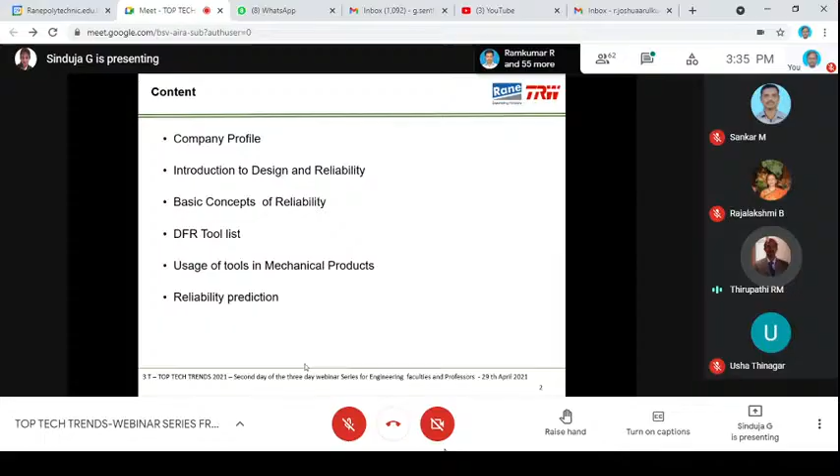So I thought this will be really a great opportunity to exchange my ideas, and then, as Madam was explaining earlier, if some of you can take 1 or 2 of these inputs and pursue them on your own in terms of your research, quoting, or examples for your real-time studies, I thought I would achieve my objective.

So this is the content of my presentation. I may not be completing almost 1.5 hours. I think I would finish it by 1 hour 15 minutes. Maybe another 5-10 minutes we'll have for some open question answers or some exchange of ideas. So I will start with the company profile to give an idea about my mental thought process on why I'm talking about such things.

The other contents of the presentation include the distinction between design and reliability. Okay, so what is the difference? I've included some mathematics for the entirety of the presentation. I do not intend to dwell fully on that, because once you start mathematics, people will start feeling it is too much, whether it's a student or any faculty.

So I would not go deeper into that, but some of my learnings from Dr. Washio and even my own classwork during my PhD, I have used some of them, so I really understand what is expected from the faculties and the researchers, so that it will be very useful when I talk about some of them. The other things to know are the handy tool list and application of such tools, especially in mechanical design and products.

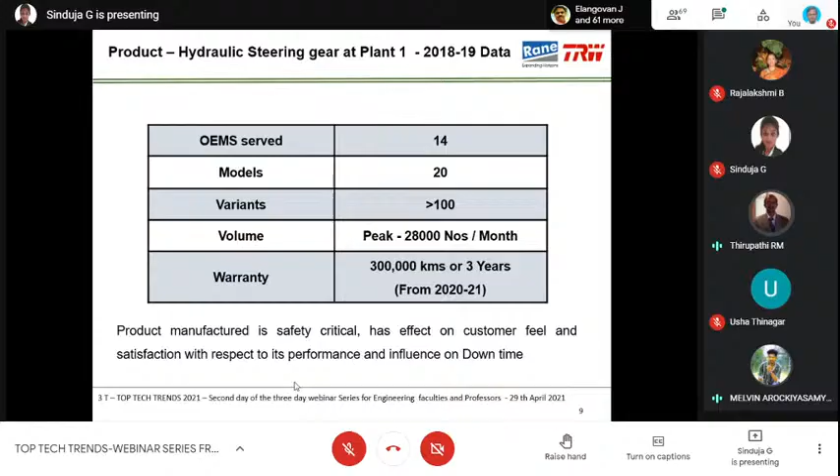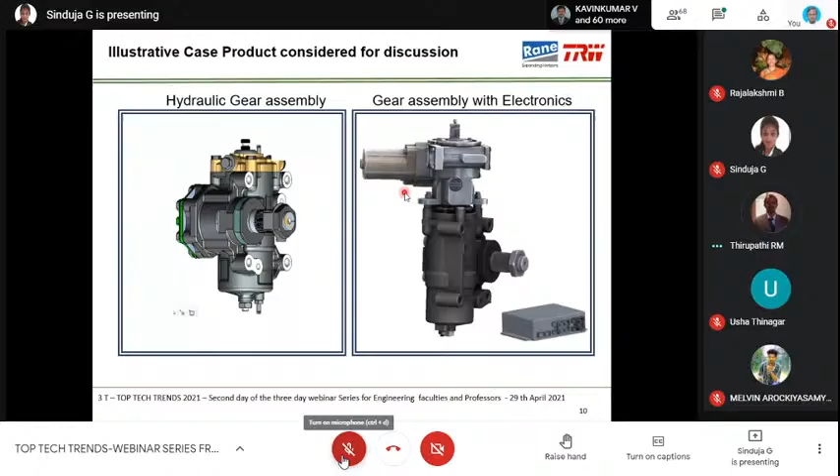I've highlighted some of the aspects in terms of my understanding, what we cannot afford to forget. So obviously, if you have a product, we need to have a user. So the user has a need, and that need has to be met by a stated objective during the entire product life cycle. So these are three important words: the user needs, in terms of the stated objective, has to be met through the entire product life cycle.

And obviously, as engineering people, we are using the help of mathematics and science to optimally convert the material to get the result out of the product. Now, reliability is the ability of the system to meet the stated objective in the stated condition for a specific period of time. Now there are two things getting added: the stated conditions and the time period. So if you're going to talk about reliability, I need to talk with respect to application, and I need to talk for a particular time.

This is very important because I was telling we are having a warranty of 300,000 kilometers, for a particular application. For example, the bus application is actually less severe compared to a truck application, so some customers are giving larger warranty terms - they give 5 lakh kilometers for bus applications, whereas for trucks they give 300,000 or 3 lakh kilometers.

So from that time onwards, Maruti has definitely defined a new standard for the Indian industry, in terms of reliability and product performance, and has been a benchmark for the commercial vehicle too. Next slide, please.

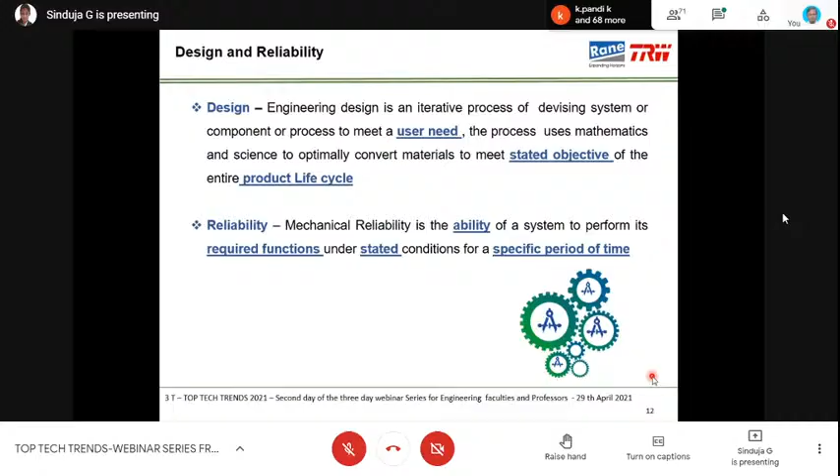So I was talking about the product life cycle. It's an important concept because about 85% of the cost is sunk into the design during its lifetime, during the design stage, like at the concept or system level, for example in a commercial vehicle.

When you talk about system design, like steering system design, 80% of the cost is fixed. If I want to go with a recirculating ball type gear design, it means my cost is fixed. I can't make it less. So this is an important concept.

The concept of design itself fixes 60% of the cost. For example, if I want to go with an electro-hydraulic gear or hydraulic gear, 60% of the total cost is determined here.

So what I'm trying to say is that only a very low amount of cost or influence can be changed at the later stages of the product life cycle. Manufacturing or operations can only improve product quality or reliability by 5 to 10%.

So it's very important that during design, development, and testing, these things are taken care of so that customers are happy and we really have a repetitive selling product. We call this a hit product, one that sells at high volume. Next slide, please.

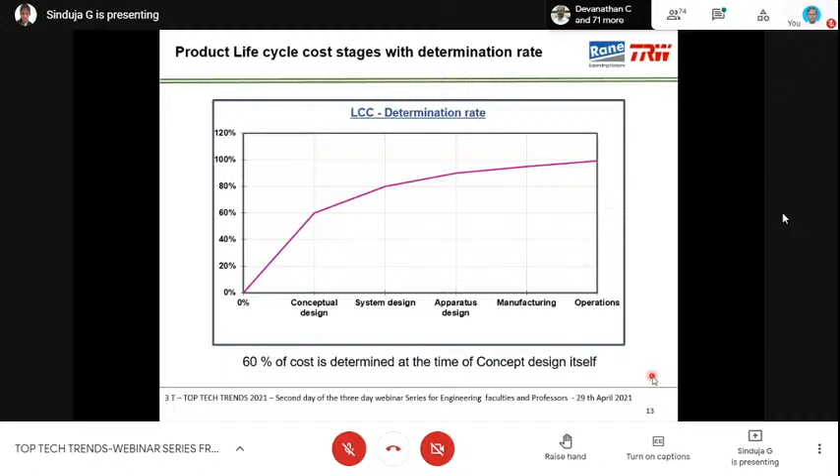Okay, so I'm trying to explain what areas need to be considered in design for reliability issues. These actually have a cause and effect relationship. We go through a reliability problem and then try to group them, to see what went wrong or what influence caused the problem.

If you look at that and try to group them, we find different areas to be considered, starting with CAD, FEA, or a database, then going to prototype evaluation and engineering model evaluation. I'm going to give 10 examples in the last few minutes of my presentation to clearly show how people have been able to improve the design from a reliability point of view.

So this might seem repetitive, but derating, safety factors, redundant systems, technical standards usage, engineering prototype evaluation, model evaluation—these have not been properly done in earlier work, causing real concerns and failures in reliability.

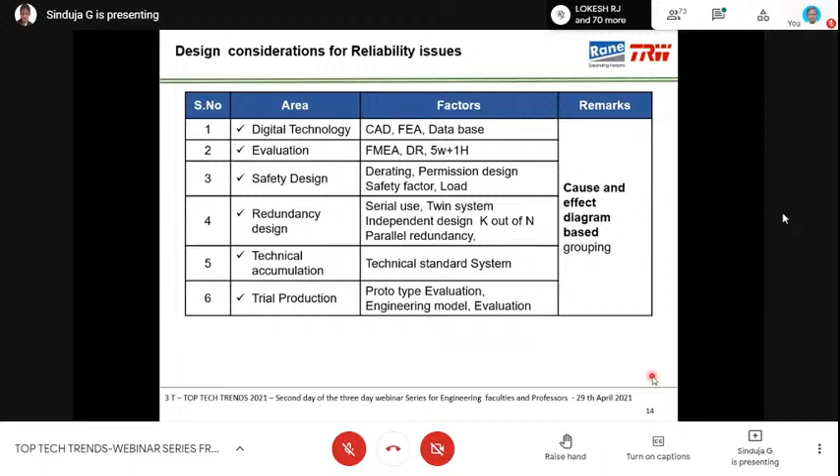You can go to the next slide, please. So when we talk about reliability, one important thing we have to remember is the bathtub curve.

This really looks like a bathtub. We talk about three areas of this bathtub curve: one is a decreasing failure rate, which comes down; then a flat one called the constant failure rate, or random failure; and the other is the increasing failure, or wear-out failure. I'm going to talk about this in more depth in coming slides.

So you can think of it like a bathtub. Many people think all products will work or fail in this way, but not necessarily. Some will have only the decreasing failure rate, some only the constant failure rate, some only the wear-out failure, or some a combination of all three.

This can be obtained by collecting data from the field or lab, like subjecting some 10 or 12 parts, or taking initial samples from the field, and then testing at least 20 to 30 numbers. But it's a very expensive process.

But overseas, when volumes are really in millions, for example in passenger cars, people used to test 200 vehicles. In fact, we also had experience when multiple products were launched simultaneously for various markets in the power rack and pinion division, across 4 countries or 4 continents. That meant they had to test in a lot of geographical conditions.

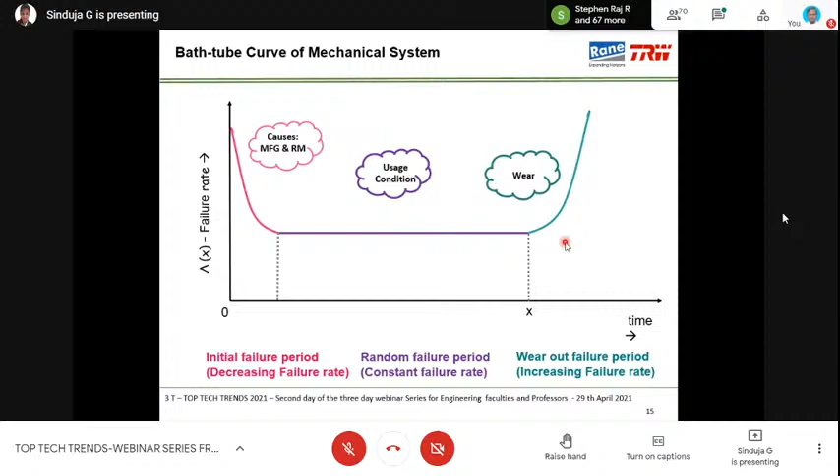They tested about 200 vehicles, so they really got good reliability data, with which they could give confidence to the customer in terms of the reliability they can deliver. Next slide, please.

So we are in slide number 16. This is a result of the solutions employed during real time problem solving.

So in my experience in Rane TRW, typically the premature failures are taken care of by consideration of the processing or manufacturing. If we are able to improve the process quality or the incoming material quality, we can really bring down the initial failure rates.

If you look at the failure rate graph, you can understand that, for example, within 10,000 kilometers, if the failure rate is very high, it means it's something to do with the raw material or process. If it's up to 40,000 kilometers, then it is something with random failure. It could also be due to severe usage conditions which were not tested during initial design.

For example, a better fillet could have been required. A simple example is a solution, but this could not have been brought out in the initial design testing, because you would have not tested a sufficient number in the field.

In the wear out failure, we need to consider a better material of the design, for example, if the material itself is getting worn out. We have nitrile rubber, which has a temperature limit of 120 degrees. If you want to use it at 135 degrees for a long time, like 8 to 10 hours, then we have to go for an even better material, from nitrile to hydrogenated nitrile, or even Viton type rubber instead of ordinary nitrile rubber. This clearly tells us that using highly reliable parts could also improve the wear out failure.

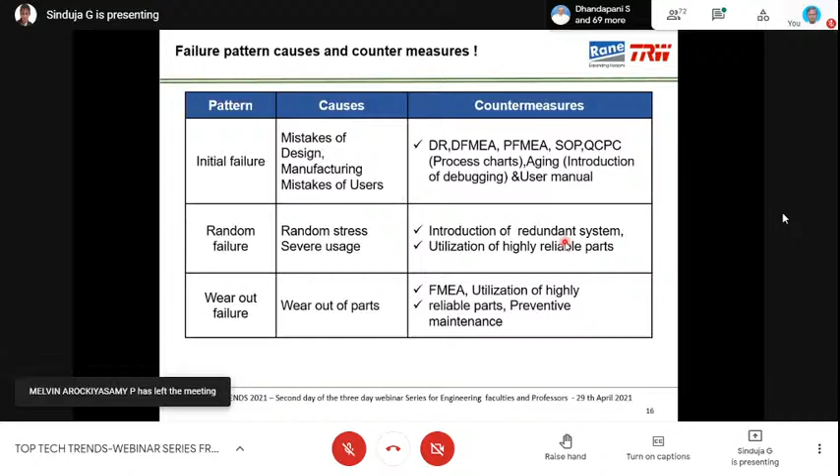Next slide, please. So design for reliability in random failure, I was telling, is slightly more difficult to handle. So simplification, standardization, and then design margins and redundantization are also important.

In terms of simplification, use of design standards for manufacturing - for example, there's always a difficulty whether to use a standard part or make it to the print. For example, I want to make a fastener, I want to make a bolt. Should I use a standard fastener, or should I make a special part to my own standards of material and thread fit, and also the heat treatment aspect?

This is slightly difficult, but in the past we always had special parts made to the drawing and print. But because the volumes are coming down, today we are trying to use standard parts, especially in commercial vehicles, and trying to accommodate it in the design itself with complementary parts. So reduction in number of parts is an example of simplification, and standardization - usage of standard parts like fasteners or bearings - is also simplification, which really helps prevent random failures.

In terms of electronics, combination of logic circuits, multiplexing of functions are also examples. It's quite difficult for us to understand here in terms of the automotive industry for design for random failure prevention, but I'm going to give some examples so we clearly understand the reasoning, and then try to provide redundant seals, redundant bearings, things like that.

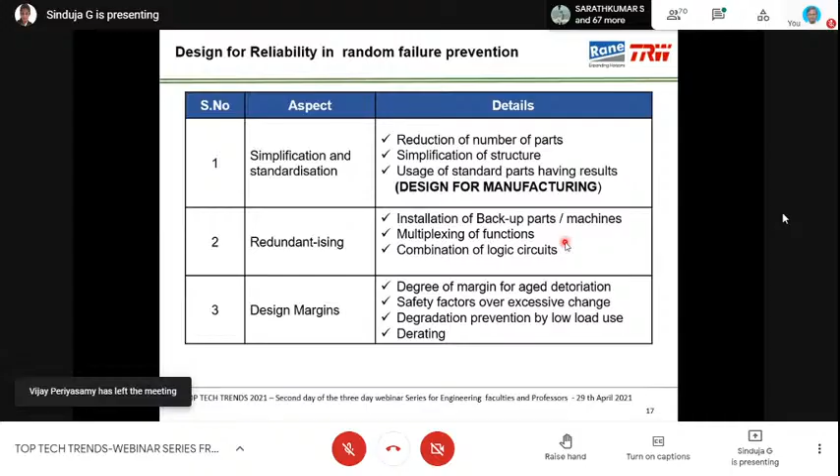And slide 18 indicates some more details of the design aspects that can be considered for random failure prevention, such as a fault-tolerant system, using fail-safe, fail-soft, or foolproof concepts. Some of you may be aware of all these things, but I thought it is important to understand the conditions of fail-safe and fail-soft.

Fail-soft is like a tubeless tire: the tire is going to leak, but it's not going to stop the vehicle movement. You can drive for, say, 100 kilometers, so the failure is soft in nature, allowing us to run it for some more time. This is fail-soft. Fail-safe, again, a very classical example is our own steering gear design.

I will again talk about this. Please bear with me, I may repeat it, because by repetition I think you will understand what my mind is thinking.

In the hydraulic gear, we have the mechanical gear, the hydraulic valve, and the hydraulic piston. All three parts are combined. So even in the hydraulic failure, the mechanical portion is going to be available. The hydraulics fail, but the mechanical gear will still be working. So it's a fail-safe design: you can still operate, but with a reduced performance level. This is a fault-tolerant system with fail-safe or fail-soft.

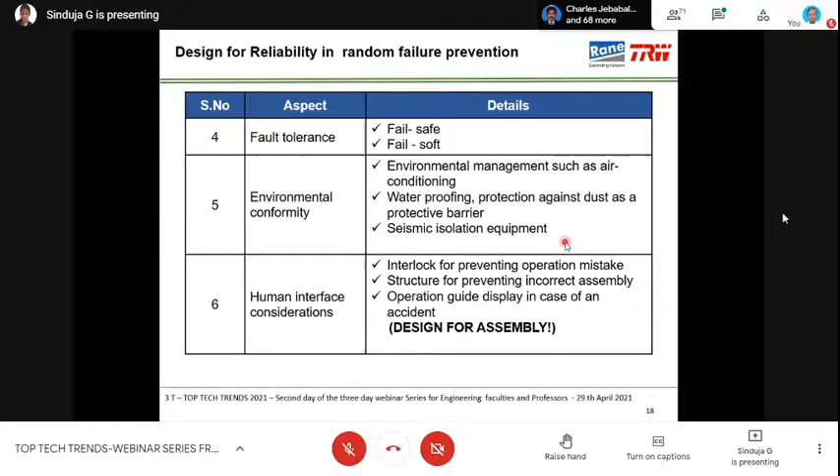Some of the examples we have in our own product, I will try to explain. The structure for preventing incorrect assembly: we have a proper poka-yoke so that there is a direction available. We have a taper so that we are not able to assemble it in an inverted way. Or we can also use an operation guide display, but that is the last one, because nobody is going to keep looking at the guideline for assembly purposes.

Next slide, please. Yeah.

There are various types of distributions available, but to make life simple, I have taken only the Weibull distribution and exponential distribution in the coming slides, so that we can understand what's happening in usage, whether it's a process-related or material-related issue. In the Weibull distribution, we have all three failures: increasing, decreasing, and constant. The magenta color is where m is greater than 1, the shape parameter.

For the Weibull distribution, we classically have two-parameter or three-parameter forms. Here I am talking about the two-parameter Weibull distribution to make life simpler. We also have the three-parameter Weibull distribution, which also has an offset parameter, but I am not going to talk about that. When m equals 1, it becomes the exponential distribution. That is a very useful way of looking at the Weibull distribution.

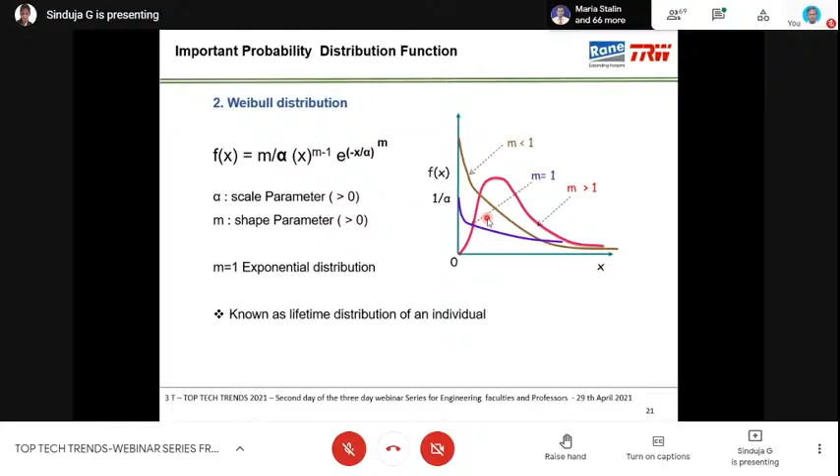Mechanical engineers as well as reliability engineers are very fond of using the Weibull distribution because it makes life easier to predict all three failure rates with a single mathematics, and then you can look at the various time factors and decide which part of the lifetime we are in, whether decreasing, increasing, or constant failure rates.

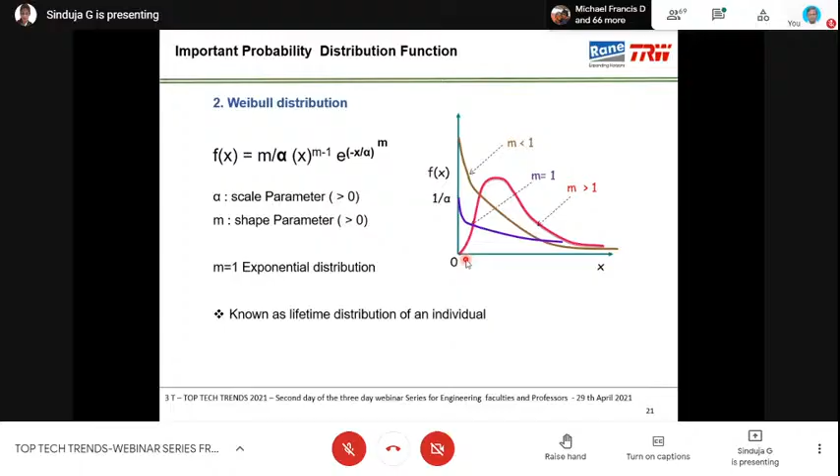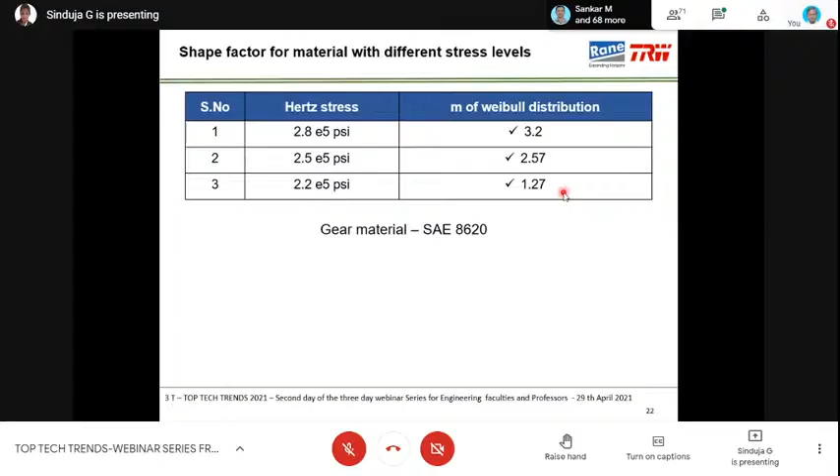Okay. Now we are in slide number 23. So classical examples of an exponential distribution are the electronic devices like transistors, diodes, resistors, and condensers, which don't have an increasing failure rate. So either they have premature failure, like I was explaining.

Electronics always have a problem of either the raw material or a processing issue. Only those failures are there. There's nothing like wear and tear happening, like a mechanical part where you have an increasing rate.

I see that Mr. Tirupati has lost the connection. So, Ms. Sindhu. Yes, ma'am. Can you continue from where he left? I think he has just left by mistake. Yeah, I think his connection is lost. Ma'am, can I take the electronics reliability? Because I'm not a mechanical person. No, I can continue. Oh, he's come back. Okay, he's back.

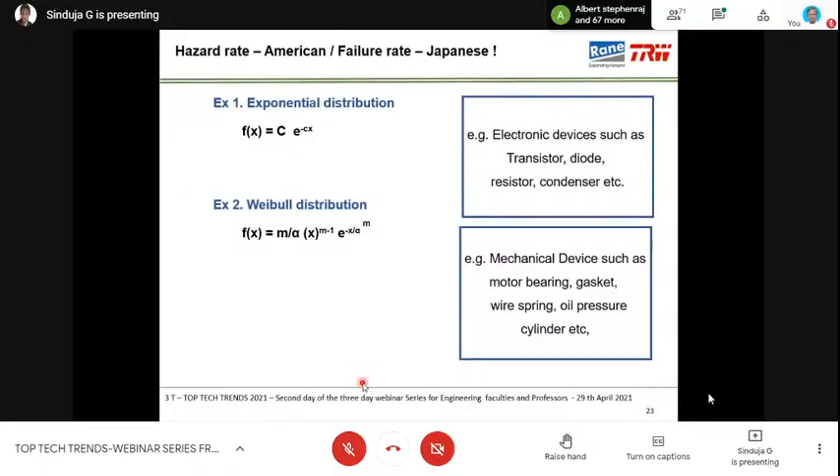So in terms of slide number 23, for the Weibull distribution, the classical examples are the motor, bearings, gaskets, cylinders, etc. So mechanical devices, as I was explaining, always follow the Weibull distribution. Next one, please. So as I was explaining earlier, the bathtub curve itself is not a single failure rate, but a combination of 3 failure rates happening for different products, or could be one product. So a less than 1 initial failure rate.

If you look at the green curve, it's a decreasing failure rate. If you can recall, it's an exponential distribution. The blue one is a flat curve, the random failure. It's very difficult to analyze random failure. Typically, it happens due to usage conditions. For example, a tire going over a pothole, which is very difficult to predict. And randomly, it can happen.

Of course, in India, on the classical village roads, you can always expect more of such failures because the roads are not good, causing wear out of the tire, tire bursts and things like that. The other one is wear out failure. Typically, it happens when the parts get aged.

For example, when you talk about 10 or 15 years of a product being used in the commercial vehicle industry, definitely beyond 5 years, you will start seeing products getting deteriorated and worn out. Like a human being, the bones get worn out, the skin gets worn out. Mechanical gears always get worn out because of the usage conditions. So the magenta line is showing increasing failure.

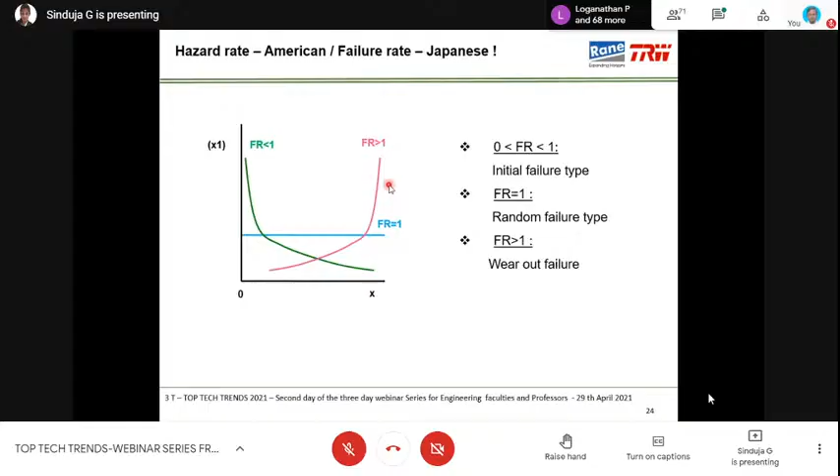And some of the journals, when you look at the overseas journals, like American journals, they talk about hazard rate. So don't get mixed up on that. So they talk about the failure rate. Okay, next slide, please.

So this is the same curve as earlier. So the first one is called infant mortality, or the decreasing failure rate, decreasing hazard rate. Second one is a failure not depending on the age, like puncture of a tire or something happening within 40,000 kilometers, or something like that.

But if you have a warranty policy of 300,000 kilometers, I would expect that the constant failure rate would happen from 40,000 kilometers up to maybe 250,000 kilometers. So this is my guess. So it could happen anywhere in between. But if you look at the tire itself, people don't give warranty beyond 50,000 kilometers. People think the tire has to be changed.

So each of the products in a commercial vehicle have their own failure rates, and each of the manufacturers or suppliers have their own failure rates because there's a limitation of the product itself. So people are coming with new innovative designs, like the tubeless tire is definitely one of them. So instead of allowing them to run for 100,000, 200,000 kilometers, we are having redundant tires in a commercial vehicle so that even if one goes off, we can run it for some more time.

Of course, tubeless tires are not coming to the commercial vehicle, but I think it's a matter of time. The tubeless tires also will come in, because there is some difficulty in the rim sizes and also the maintenance of the rims, because it cannot take a deformation of the rim. Now the last, but not the least, is the increasing failure rate. Definitely, this is wear. Can you go to the next slide, please?

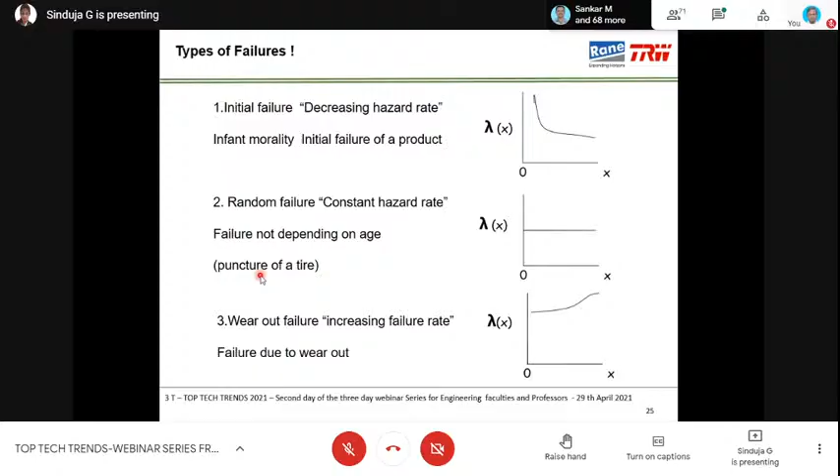So I will explain some of the concepts, how in the product life cycle we can take cognizance for improving the product design, cost, product quality. I was telling about QFD, not explaining. QFD is nothing but a quality function deployment tool. It's actually a very powerful tool used by the Japanese to convert the engineering requirement or a customer requirement into product specifications.

For example, I want to use it for 2 times the rated load. I want a factor of safety of 3 times the rated load. For example, burst test, I want 3 times. What is the minimum voltage I have to maintain? So some benchmarking can be done. So we don't have enough data, but sufficient information is available.

So don't get me wrong that data is not required. Data, I mean extensive data in terms of number crunching. I'm talking about running some 200 odd information and then generating the classical curves, getting the Weibull plot, and then getting some B10 life and all that. So those types of things are not required. The other one is redundant design. Again here we don't require data. We have some information in terms of benchmarking.

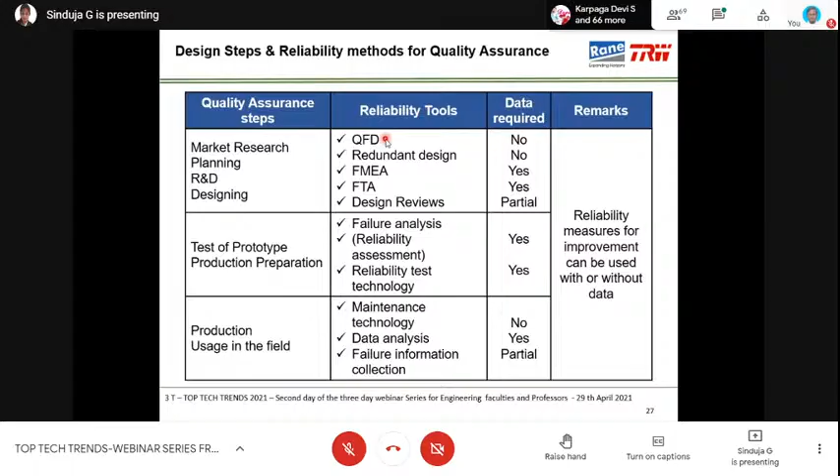For example, Toyota gives a B5 life of 500,000 kilometers on their own product lines, whereas for Indian customers, we talk about B10 of 300,000 kilometers. So you can understand the difference in the technology of the products in terms of how they are able to provide a higher confidence base. Basically, they are able to do a lot of work on employing the design concepts ahead of the competition. Next one.

So I come to slide number 28. So this is how you go about improving the product reliability. Very simple, like a PDCA concept: plan, do, check, act. We have to first plan what should be our reliability, that is, we have to specify the reliability. What is the reliability we want? Then we have to design for it, then test for it. This is the do part of it. Then check for it in the manufacturing. And if there's a problem in the field, we have to work on improving it.

So this PDCA cycle is being used across any product improvement whenever you have a difficulty in doing something. Sorry, the plan part comes with specification, the do part comes from the design and testing, the check part comes from manufacturing, and the act part comes from the field usage and the continuous field quality improvement. Next one, please.

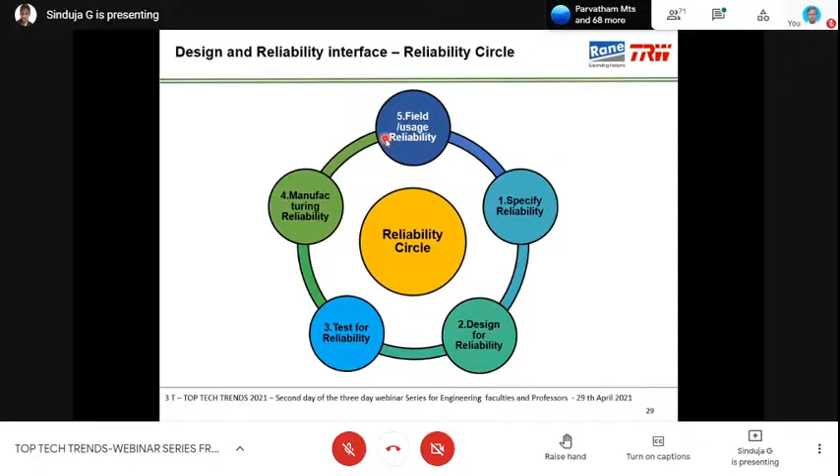So now, how to set this specification, reliability targets? Various inputs are available from the customer, OEM, or a program, from the past experience, or the top management. And we require sufficient information like warranty data, customer survey data, benchmarking, end user duty cycle, manufacturing data, operating environment, and the policy of the percentage, like how many percentage of defects I will allow.

For example, I'm going to talk about the output here: failure free period, incidents per 1,000 vehicles, mean time to failure, or MTTF, mean time between failure for the parts which are going to be repaired. And like B10, that is 10% failure of the life. For example, if I launch 100,000 numbers in a year, I will allow 10% of them to fail within this. So beyond that, they have the design life. I'll explain again with some more clarity later.

Now, processes in terms of apportioning, considering the criticality and the product life cycle costing. This is actually given to the product and process design teams. So the reliability is set based on the past experience. Typically, the customer or the top management, when launching a completely new program, says, okay, I want to have a higher warranty policy. Then probably I will use a higher design specification. Then over a period of time, I will be able to improve the product specification to the customer. That's how the top management can give a direction at the start of the design. Next one.

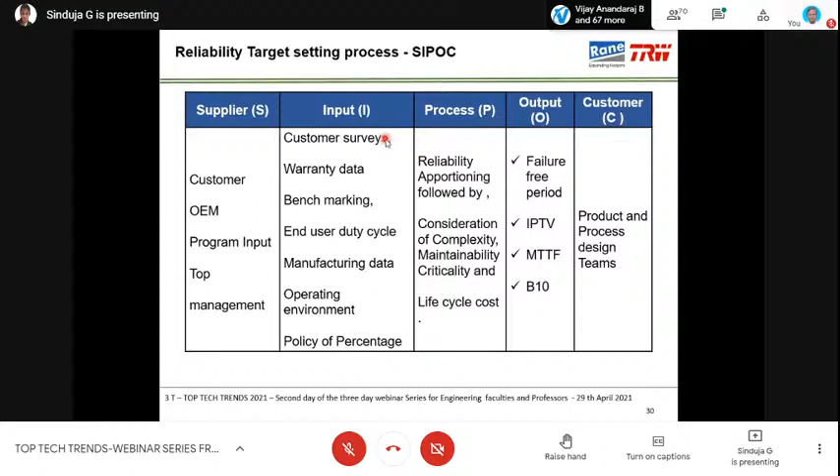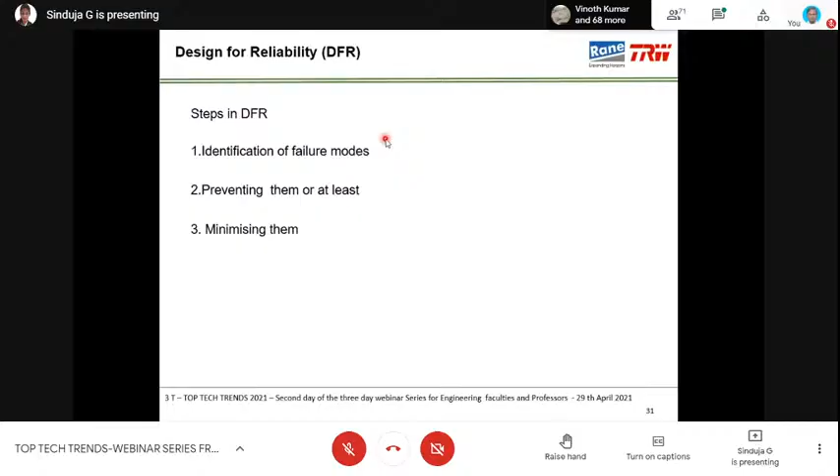So, what are the steps of doing the DFR? Identification of failure modes, preventing them or minimizing them. So, how do you identify the failure modes? I've taken only very simple examples here of a DFMEA. FMEA I was telling earlier, now I'm talking about DFMEA, the design failure mode effect analysis. The other one is the process failure mode. I'm not talking process failure mode, even though that also has to do with the process design. As a product designer, I'm talking DFMEA. And then the fault tree.

Fault tree is actually trying to get the actual failed part, looking at it part by part, trying to understand what is the failure, where is the failure, which component has failed, taking a closer look from the Gemba, looking at the product and the physics of the problem. Then really I can understand what has gone wrong. The fault tree analysis is a very useful tool to identify the failure modes.

Now, some of the other prevention modes are to have a stress analysis and parameter design by design of experiment. And then minimizing failure modes is the tolerance design, design for manufacturing. I was explaining earlier about the classical problem of using standard parts or made-to-print parts. Okay, so still a lot of debates go on, but the latest thinking, obviously, is to make the cost less.

People are talking design for manufacturing using standard parts from the big suppliers, using the tolerance design so that we can overcome the failure of the parts by means of taking care of the design itself, so that the tolerance can be accepted as it is from the large volume manufacturer of a fastener or a bearing. Now the other one is implementing redundancy.

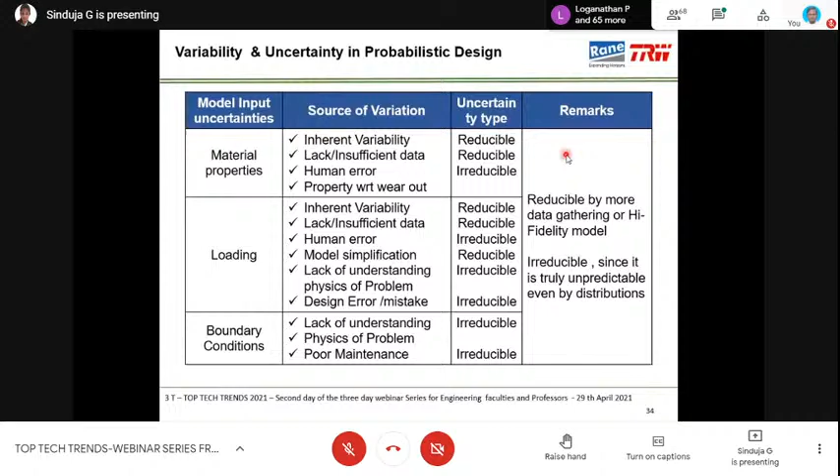So this was really one of the problems we had in the last 2 years, which we could actually resolve with a lot of time and money spent. But it's very tricky - there's a learning curve for us in terms of trying to understand what can be done for the boundary conditions to be understood. So we really have to run in real life conditions and then probably have sufficient representation of what's happening in the field.

Next one - so when we come to reliability predictions, please. So I'm giving a classical example of a spring here. Just give me a minute where I wanted to understand what are the different causes for the failure.

Okay, the different failure modes are like fracture or loss of spring rate. Looks very simple, isn't it? The failure mode is what we can actually see - as an end user, it's fractured, broken, worn out, spring is lost, spring tension is lost. Now, what are the causes for them?

If the fracture itself could be because of a material defect, so now you can recall this material defect could cause a reducing failure rate, or it could be a starting problem like decreasing failure rate. You can recall that raw material problems will typically result in a decreasing failure rate in that part of the bathtub curve. Now hydrogen embrittlement is again a process.

So we had a classical example of this hydrogen embrittlement in some of our fasteners, because when the part is getting heat treated, we have to follow the hydrogen de-embrittlement process so that cracking doesn't happen on the part.

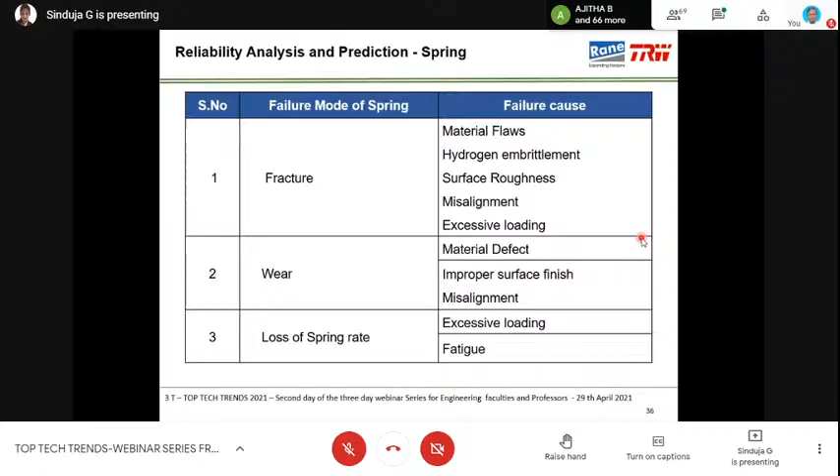As you look at a design standard for a steering gear, I think we have evolved over a period of time in terms of what needs to be done, what are typical failure parts, and how to take care of them.

So I was trying to explain factor of safety earlier. For example, factor of safety means we have to design the material to withstand a stress. Normally, a safety factor considers a deterministic value of stress in the part against the material strength. In reality, they are random variables. So as I explained earlier, the stress and the strength are not a single point, not single deterministic values. They have their own curves.

Imagine here there's an overlap, so the intersection is actually a zone of failure. That can be calculated using a simple mathematics formula for safety margin, by means of the difference between the stress and the strength. Strength is the material aspect, stress is what actually happens in the application. So with respect to the variability, we can get the safety margin.

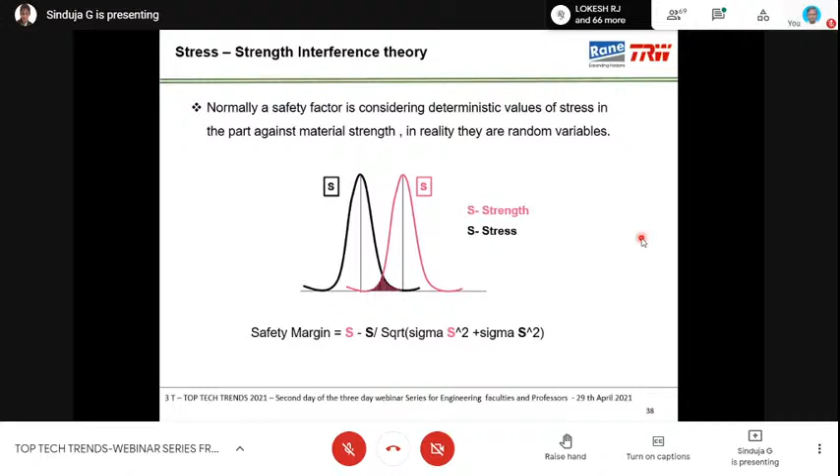So this is some examples of stress and strength data. The stress we talk about is mechanical stress, tensile or compressive in nature. Strength refers to ultimate tensile or yield strength, the different types of strength. These are design factors that affect stress, for example due to cyclic load, duty cycle, speed of operation.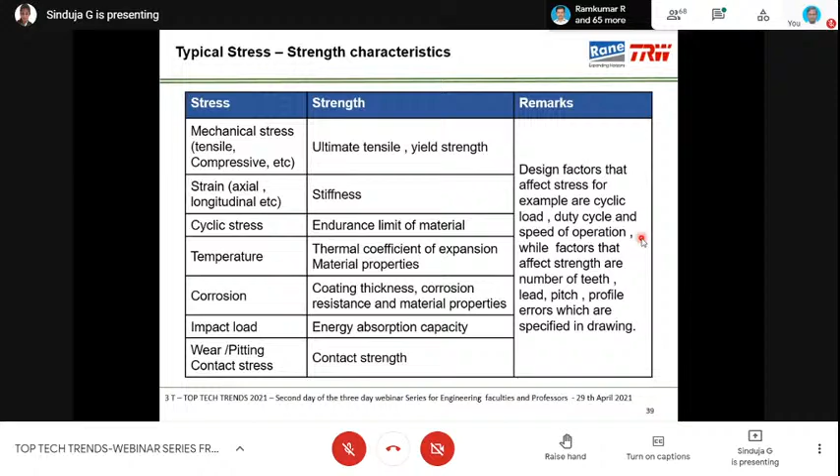Factors that affect strength include geometry, number of teeth, lead, pitch, profile error specified in the drawing. So definitely we have to take care of both aspects - how it's going to be used and how it can be determined in the application. If you look at stress, for example corrosion stress, the strength could be the coating thickness, corrosion resistance, or material property. This has to be taken care of. Wear or pitting contact stress has to be taken care of by the contact strength.

In terms of the duty cycle, cyclic load, speed of operations, aging - that's some of the stress-related aspects. Strength could be heat treatment, dimensional assembly process, variations, bending strength, etc. So strength is specified and built into the design, and the stress is developed during usage.

Strength is obtained during the lab test. Stress is obtained in usage condition and usage profile that should typically represent 95%. But with my recent experience, I think 95% of users is not enough. We should look at 99% of users so that we reduce the warranty cost.

Last but not least, the simulation, like Monte Carlo simulation, can be used to evaluate the stress and strength distribution for obtaining the life distribution. I can specify the curve itself - okay, this is a normal curve or a normal distribution with what is the variability of that.

So if you recall the stress and strength curve, factor of safety or the design margin I was explaining earlier, we can actually do a Monte Carlo simulation so that we can estimate the amount of overlap. By means of the latest tools, we can predict reliability. It's very funny that we can do prediction of reliability without actual high volume testing. I think our computer engineering comes in to help by use of tools like Monte Carlo simulation.

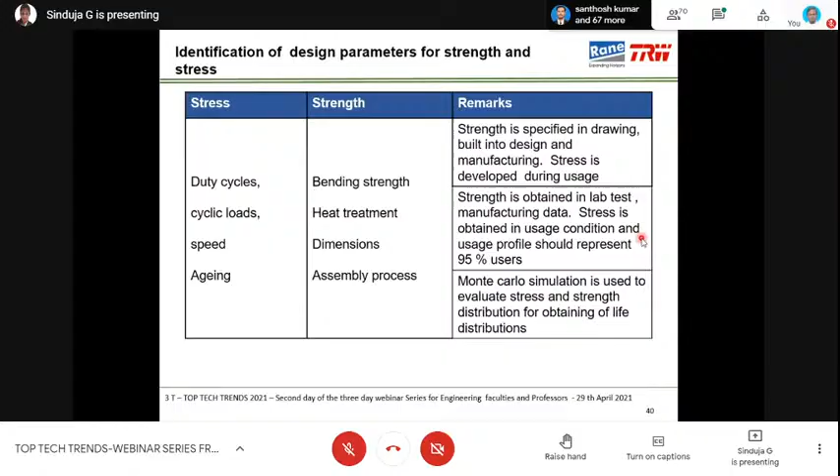With that curve, I can actually get the real-time factor of safety, which can really help me tell whether that's good enough or I need to improve something else in terms of the safety standards or strength itself.

Human interface reliability, I was talking earlier again - foolproof, fail-safe, fail-soft. Foolproof is the process designed in such a way that the activity of negligent performance, which becomes the cause of failure, is not allowed to happen. Classical example: camera, shutter, and a flashing device. That's foolproof, I already told this example.

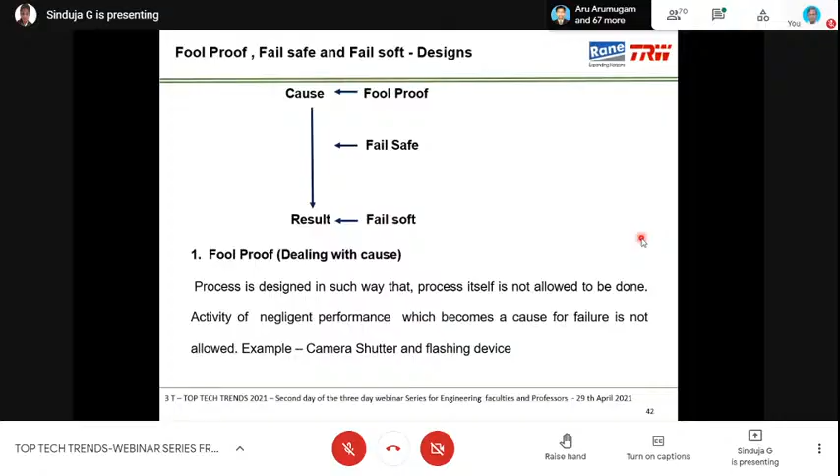Fail-safe: even if it fails, it will work safely, allowing the system or component to work with limited trouble or limited performance even after the failure happens. Like hydraulic steering gear with a pump failure - the gear can work in a mechanical mode. I explained earlier, the hydraulic gear is a combination of mechanical gear with a hydraulic valve and a hydraulic piston.

Fail-soft is like a battery in an automobile - it doesn't go off suddenly, it wears out, it starts discharging slowly. It's strange that during my experience in a car, the battery suddenly went off. I think I was quite unaware because the maintenance was so good that it suddenly failed one day after crossing 4 years of life, and suddenly I could not start the car.

And found that the battery was completely drained. But normally what happens is you get some starting trouble, then the starts, the light gets dim. With improvement in battery technology, I guess fail-soft design in batteries is getting highly reliable in nature. But tubeless tires is another classical example - I already told that it occurs very slowly, you can actually use the vehicle for some more time.

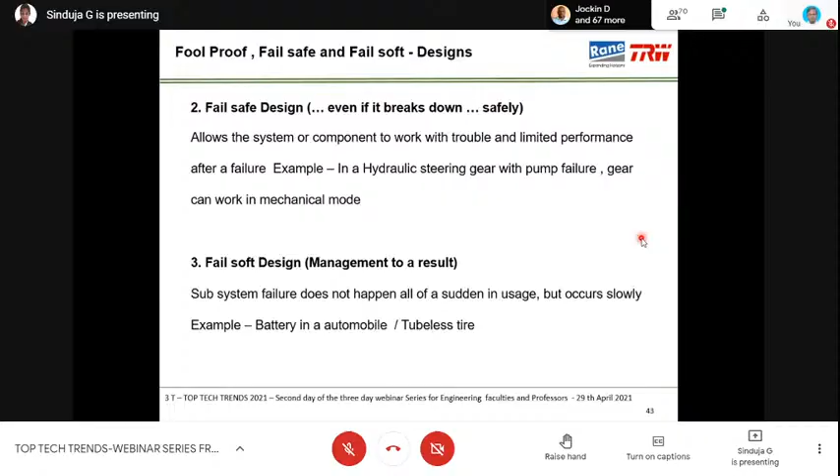Now, test for reliability - how do you estimate reliability? Without testing, you cannot really get the reliability curves or reliability value.

So you have to use practical usage tests or accelerated durability tests or special environmental tests, like to simulate the field or drive condition. In the lab, we have to use a bench simulation, like an engine bench simulation test, or a lab bench - for example, steering gear using a bench simulation test. It's a system - like steering gear and hydraulic pump - put together and tested as a system.

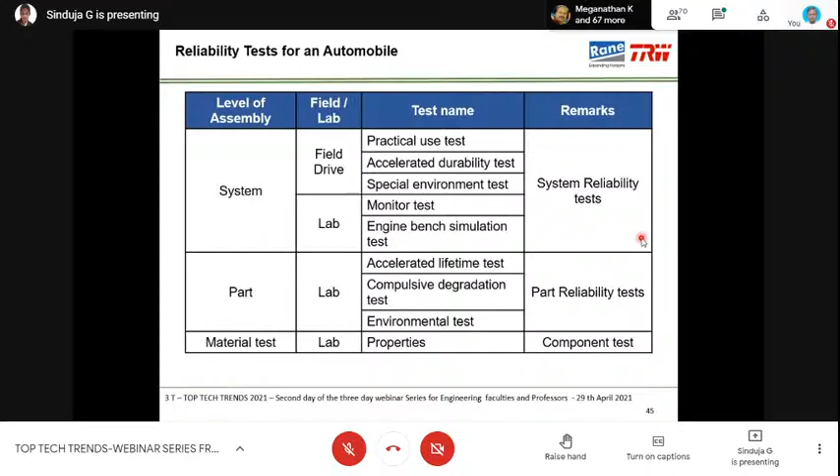We also do rubber parts accelerated lifetime tests and compulsive degradation tests, like high temperature part reliability tests, or low temperature with contamination. So it's a degradation test, typically to take care of the environmental aspects. The material test is another important area. For example, lab tests on the metal property itself can be verified.

Next. I was telling about the B10 life. So if you're able to plot the life of the gear parts as they get worn out, the numbers keep increasing with respect to time. This is not the failure rate. This is the failure. Okay, so this is not a bathtub curve, so don't get confused by that. The area under the curve, B10, is where 10% of the population has actually failed.

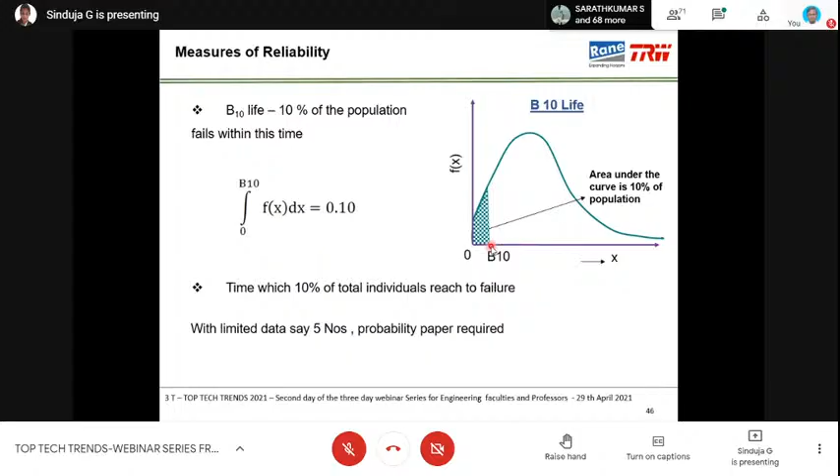So we might use special probability papers to estimate the B10 life when you have got limited information. At least we have to have 5 numbers. Our guru, Dr. Washi, used to tell that at least 6 to 10 numbers is good to test at a component level to get the B10 life. The OEMs try to do 20, 30 numbers, but some of the fast car customers, as explained, do up to 200 numbers to try to get the B10 life. Next one, please.

So reliability estimation is done on a new product in order to predict the field quality, to judge whether the field quality achieves the target. For example, no failure up to 3,000 hours of operation in the lab or in the field. So laboratory tests should be conducted. If it does not achieve the target, some design changes must be done. So this is a classical example. If the product is not achieving that reliability target, what to do?

Typically, as a designer, I would tell, okay, we have to improve the process. But Dr. Washi used to tell that if something is wrong with the testing, and you are doing it as a designer, what is under your control is the design. So you should do some changes in the design. Let us not forget the product life cycle itself, where we already told that 80% of the cost is taken care of by the product design. Obviously, the place to improve is also the product design rather than the process design.

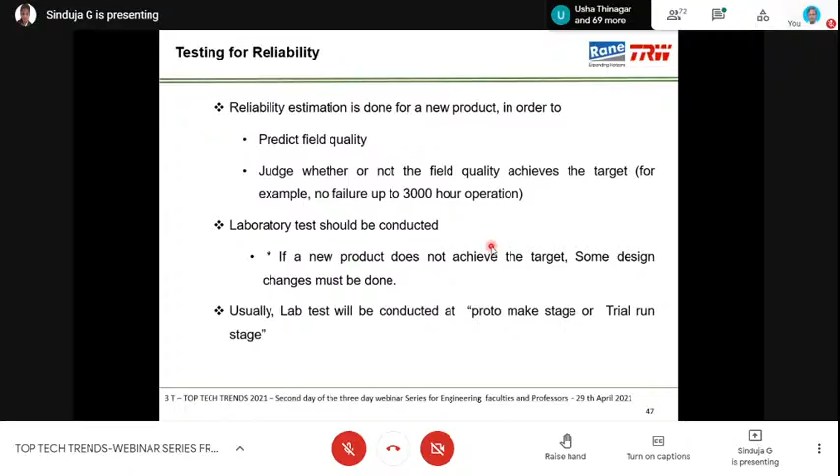Usually, lab tests will be conducted at the proto stage or in the trial run, so that we get a good correlation of the actual field data and the proto data, which can be extensively used for future products. Next one. Step one, find out the proper lab condition so that we have the same failure mode. This is very important. For example, I have a seal failure, so my test lab should also have the same failure. I should not get another failure mode, otherwise it is not of any relevance to me. Failure mode should be the same.

There must be a correlation between the field tested data and the lab data in terms of the slopes. The product must fail or suffer the critical failure mode in a specified period of time. For example, in the lab, it should fail within a week, 2 weeks, or within a month. The proper lab test condition is actually found through trial and error. Very difficult sometimes. But with the experience accumulated by the industries, classical test conditions have evolved, so we are able to get the proper lab test condition. We have standard lab tests used to predict the lab failure modes, then try to see how we can correlate to the field test.

Field failures, typically in hydraulics, are seal leaks, sometimes noise issues, and very rarely a classical breakage problem, because the design has matured over the last 40 to 50 years. But this is tricky in terms of the noise and the leakage, where we are currently trying to improve the reliability. Next one.

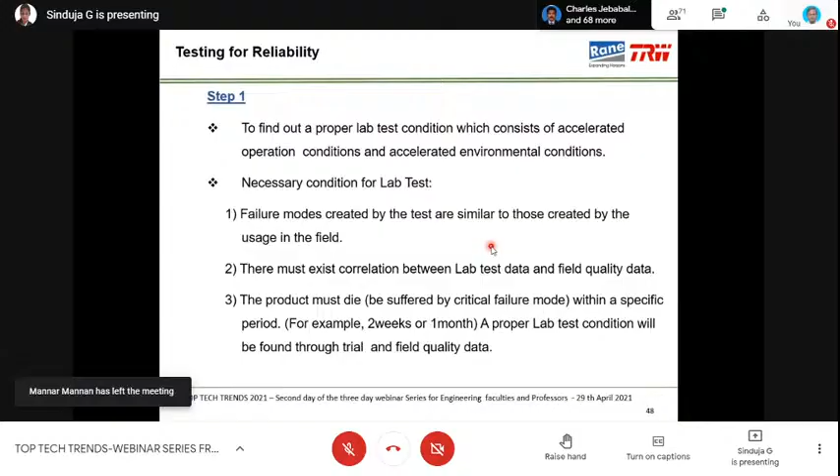So this is a classical example. Product one, the B10 life is 50 hours, and the field data, for example, is 15,000 kilometers. Okay. So second one is product two. The B10 life is 100. The B10 life is 35,000. So if you look at it, there seems to be some correlation. Like there's a factor of 300 in the first one. There's a factor of 350.

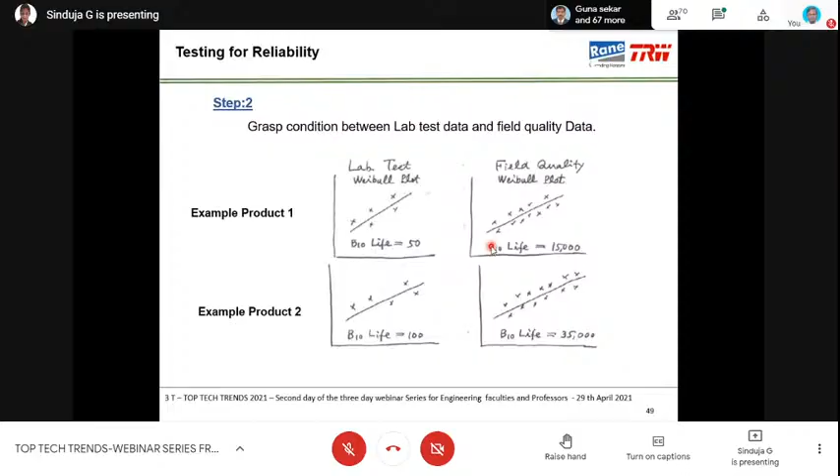Now when you do a product three, you go to the next slide. Okay, B10 life is 200. So typically based on the previous experience, I can give a B10 life of 60,000 to 70,000. Okay. So this is how the field quality is predicted with the lab test data. So that's my thinking of how to go about improving the product reliability. Definitely, we have to specify the B10 life. You have to do both the lab test and the field test of the past information, and then try to predict the future. Next one.

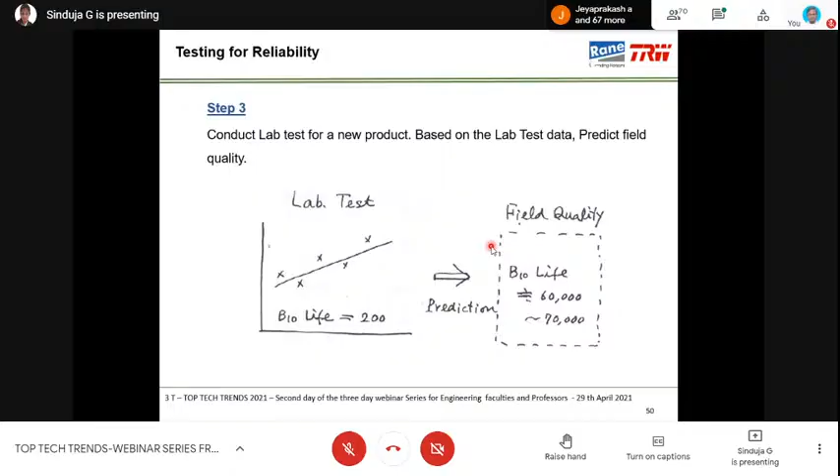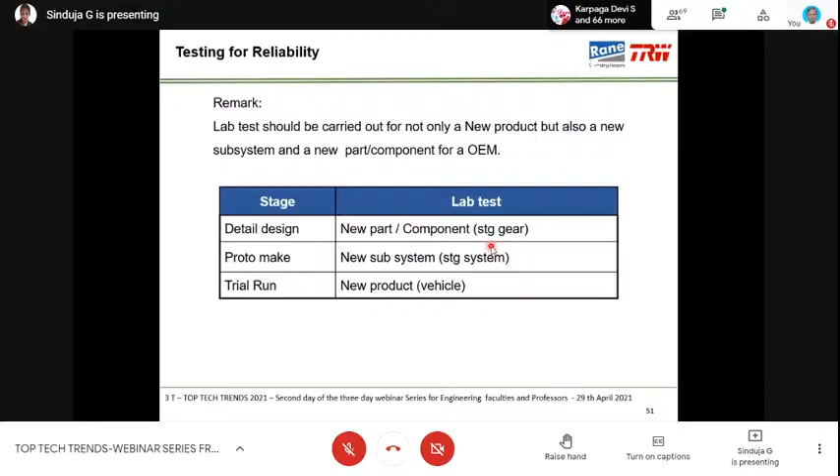Yeah. So lab test should be carried out for a new product, but also on a new subsystem or on a new vehicle, OEM level. Okay. So only then we get complete information of what the typical failure modes are. Next one.

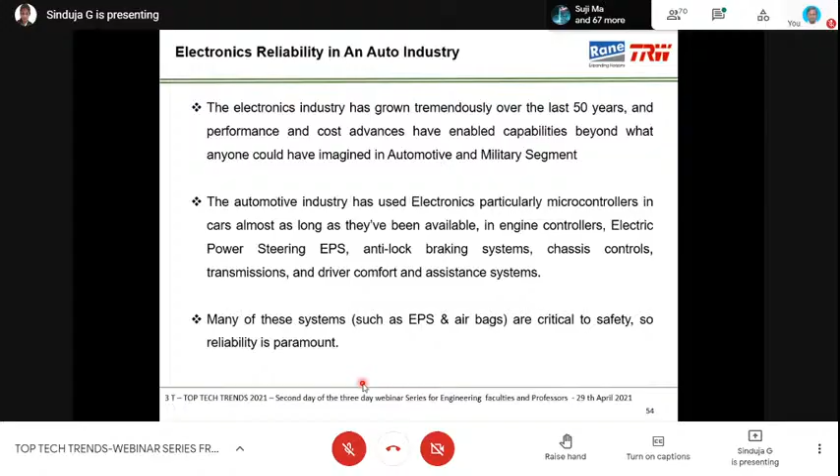Even a simple low-cost hatchback car contains at least 5 to 10 ECUs, basically for engine, steering, braking, window, and infotainment, in which many of the systems are safety critical. Example, steering and braking systems. In these systems, safety is critical, so obviously reliability is paramount. So I'm moving to slide number 55.

So back in 1990, General Motors, Ford, and the semiconductor council created the Automotive Electronics Council to set a standard for temperature and pressure resistance for electronic components to ensure the consistency of the safety specifications. So as per the standard, AEC Q100 is for integrated circuits, for example, microcontrollers, gates, EPROMs, drivers, and other power controller ICs. AEC Q101 is for discrete semiconductors, for example, MOSFETs, transistors, FETs, etc.

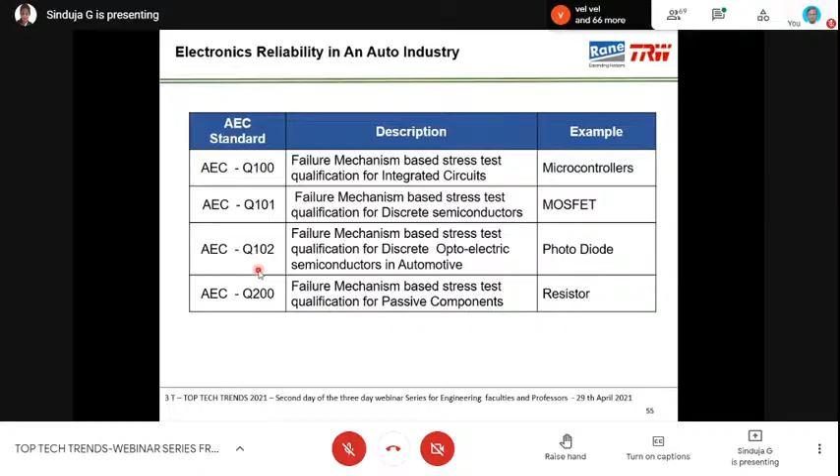Q102 is for discrete optoelectronic semiconductors, for example, the photodiode and phototransistor. Q200 is for passive components like resistors, capacitors, and inductors. To summarize this slide, the automotive industry started to use AEC qualified components to increase reliability and safety. I'm moving to the next slide.

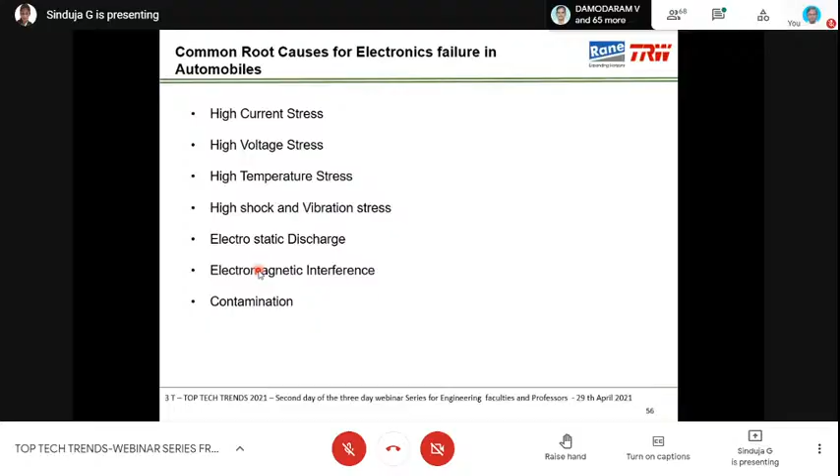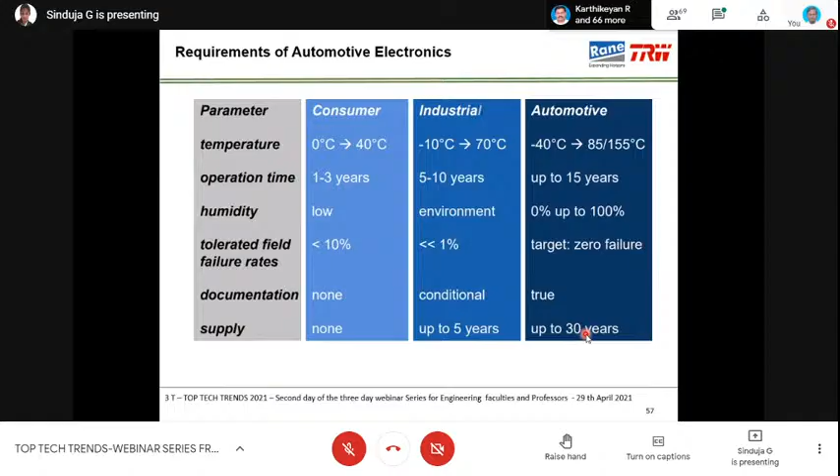I'm moving to slide number 58. This is the example of the temperature requirement. If you see the consumer electronics, the temperature increased from 40 degrees Celsius to 60 degrees Celsius in the period of 20 years. As for the automotive electronics, the temperature rises almost 100 degrees Celsius. The main reason for the temperature rise is the ECUs were mounted on the chassis or under the hood, which increases the temperature requirement.

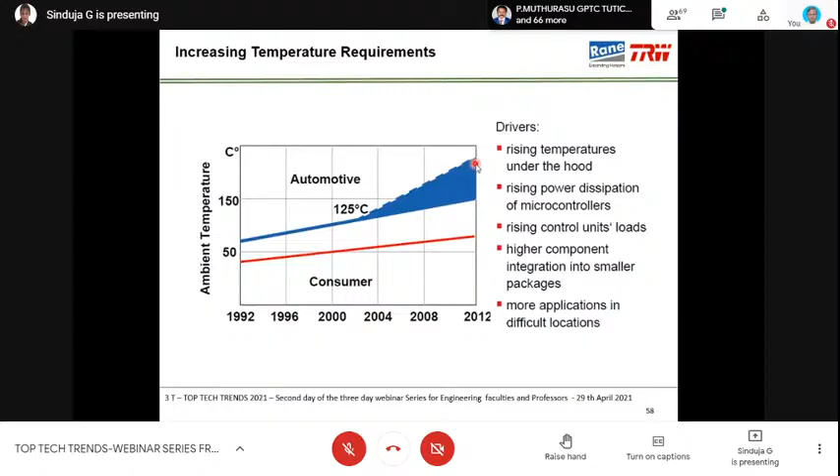The second reason is the high loads are connected to the controller, a higher number of components are integrated into the controller in smaller packages, and the entire ECU is built into the actuator itself. It will increase the temperature requirement drastically from 55 degrees Celsius to as high as 155 degrees Celsius. So I'm moving to slide number 59.

So in this slide, you can see three different topologies. The first one is the remotely mounted ECU, in which the silicon is separated from the actuators, so the junction temperature TJ is nearly 150 degrees Celsius. In the second topology, the ECU is fitted adjacent to the actuator. Hence, the junction temperature of the semiconductor can rise up to 175 degrees Celsius due to the heat radiation from the actuator.

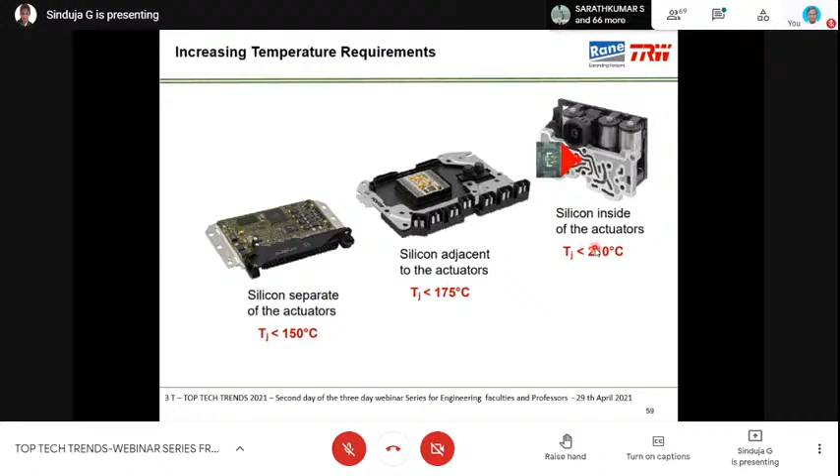In the third topology, the ECU is built inside the actuator, so the junction temperature rises as high as 210 degrees Celsius due to the direct heat conduction and radiation from the actuator. So this is the mapping of the temperature to the vibration requirements for automotive electronics. The electric power steering, EPS, is what we are currently working on. For EPS, the temperature requirement is almost 125 degrees Celsius and the vibration requirement is almost 30 G.

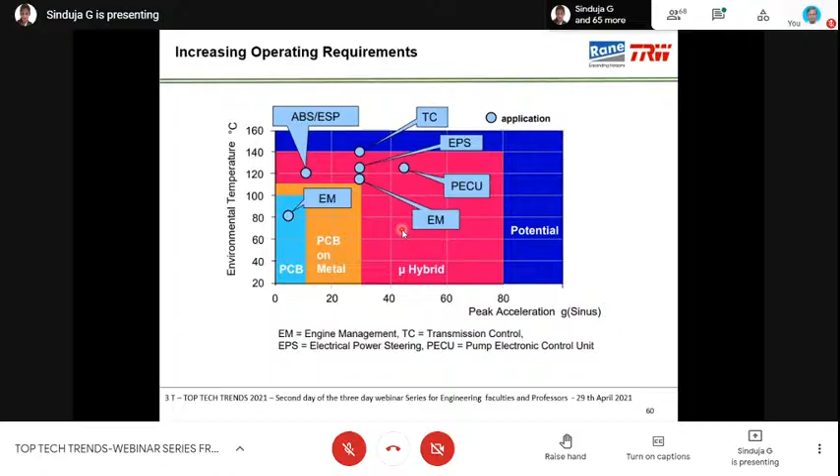So we have to design the electronics, that is the ECU, by considering the stress level for better reliability and safety. Moving to slide number 61. So as I said in the previous slide, this is the example of the EPS, in which the temperature requirement is 125 degrees Celsius and the vibration requirement is around 30 G.

So the temperature and vibration requirements have been taken care of by means of automotive specific technologies like direct bonded copper or binder clips or a low temperature co-fired ceramic technique, in which the entire electronics is built over the copper substrate. You can see the copper substrate here.

So the entire electronics is built over a copper substrate, and the bigger components like the common mode choke, differential mode choke, and the capacitors are horizontally mounted and bonded by special binders and adhesives. With this, we can achieve temperatures up to 125 degrees Celsius and vibration levels up to 40 G. And I'm moving to the next slide.

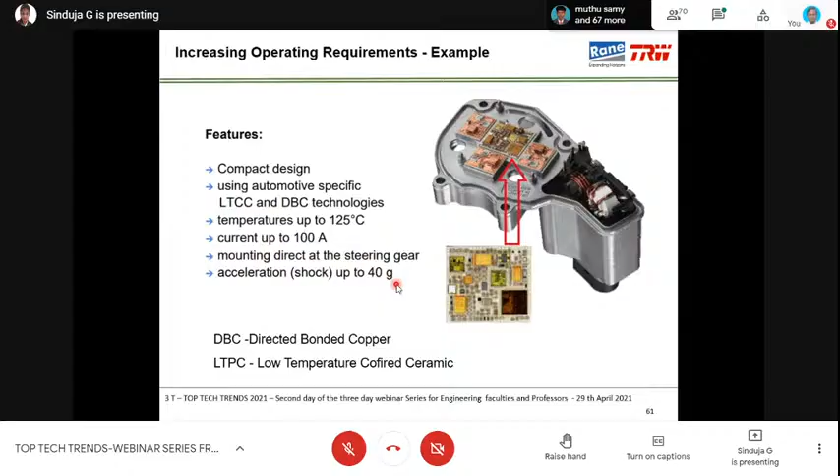These are the reliability prediction guidelines used by the various industries. The first one is the MIL-HDBK-217 standard from the defense industry. It's a very widely used standard. The second is Bellcore TR-332 for the telecommunication industry, which is very similar to MIL-HDBK-217.

The other one is RDF 2000. This is the latest and most comprehensive European methodology, developed by CNET. PRISM is a new technique developed by the Reliability Analysis Center, which has the ability to model thermal cycling and dormancy. Now moving to slide number 63.

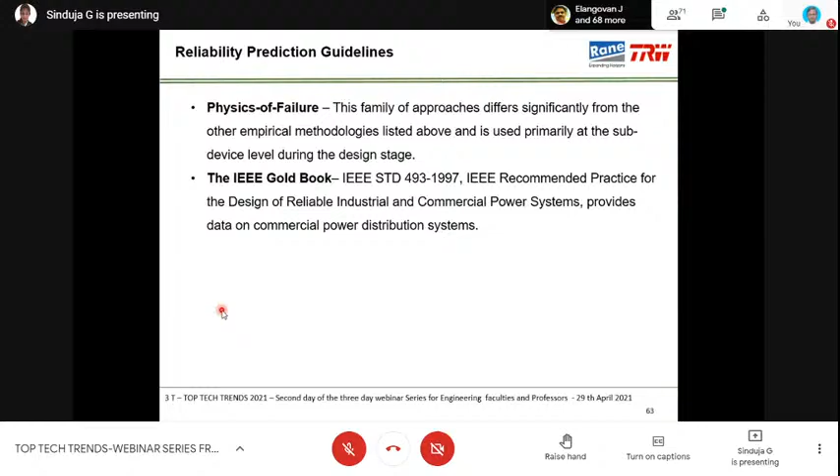So physics of failure is a family of approaches that differs significantly from the other empirical methodologies listed above, and is used primarily at the sub-device level during the design stage. The IEEE Gold Book, that is IEEE Standard 493-1997, is the recommended practice for industrial use. And I'm moving to slide number 64.

In this slide, it's just an overview of how reliability is predicted as per the MIL-HDBK standard. The standard gives two different methodologies for reliability prediction, namely the parts count method and the parts stress method. The parts count method requires very little information, that is, how many parts are being used in the design. That is all the information required for the parts count method.

This is carried out in the initial phase of the design, where you don't have much information or a detailed design. So in this method, the total failure rate is calculated by simply summing up all the individual components' failure rates.

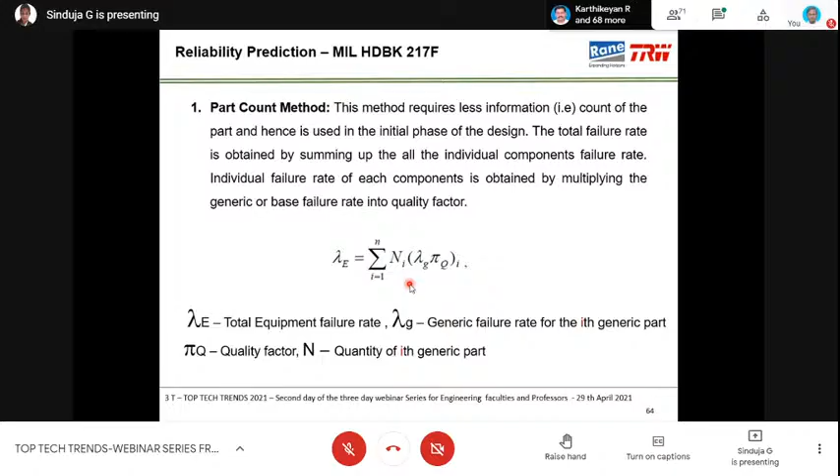I'm moving to slide number 65. Okay, on the other hand, the parts stress method is used in the detailed design stage, where you have the complete circuits and schematics. So the total failure rate is calculated by taking account of electrical stress and the temperature stress of the individual component.

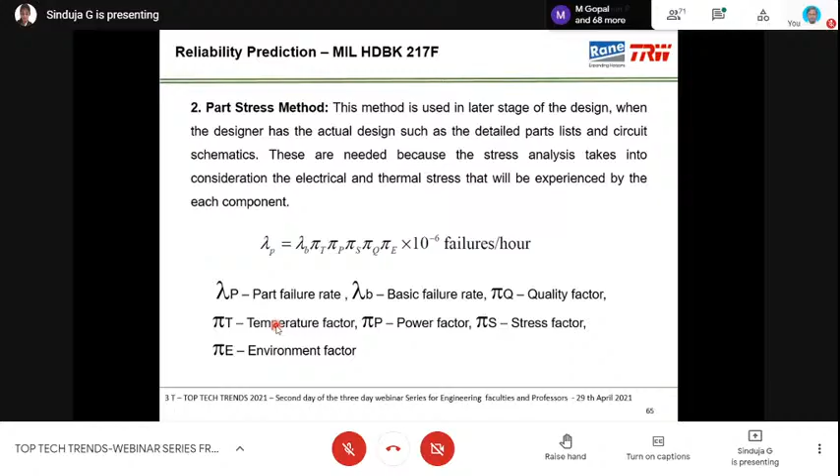So thank you. I just finished my topic. I request RMT sir to continue. Thank you. Yeah, thank you, Sinduja. Can you continue the slide?

In terms of the failure database, there are multiple databases. Definitely more is available for electrical, electronic items, and more of mechanicals are coming from the military standards and also from the Reliability Analysis Center. So if you look at the International Electrotechnical Commission standards of Switzerland, you've got electronic components standards available. Some of them are from IEC standards, and some of them are military

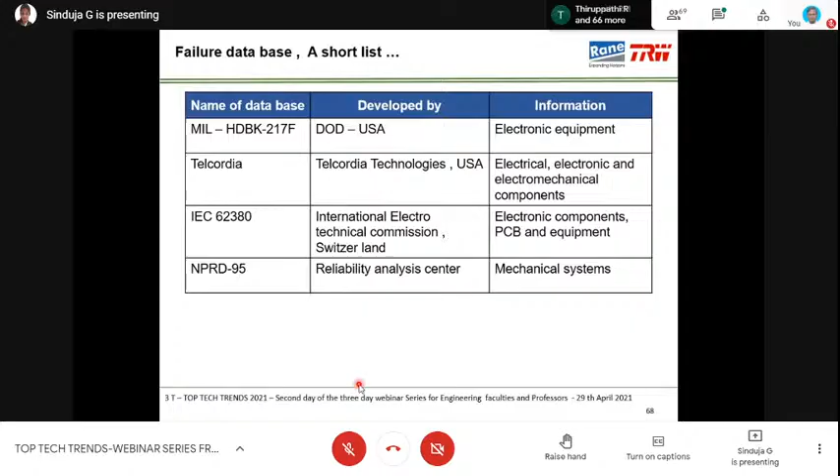So in terms of commercially available software, we have some experience using ReliaSoft for accelerated life testing, reliability prediction, reliability analysis. Even though I think as a beginner, it's better to use the manual methodology of a graph paper to understand the dynamics of the reliability predictions. But then as you mature, you can use ReliaSoft.

ReliaSoft is available, not very expensive. Maybe it cost something like 1 lakh or 1.5 lakhs is what I remember. Very long time back we bought that. But definitely you should have some understanding of them for academic purposes. There is the spectrum item software and some of the other things which are being used as reliability prediction tools. Next one. Yeah. So this is my last 2 slides.

I'm going to talk about how we have taken care of reliability in the actual applications. So one was product derating. I was explaining to you that long years of manufacturing of the process helped us to take care, because when we had the technology transfer from the US to India in 1985, the full production started in 2000 only. So almost 13 years we had, because the factory was established by 87. And then we used to localize part by part.

So at that time, we could not use all the parts to the full specification, because we had to mix and match the imported parts and the local parts. So what we were trying to do is use the derating to our advantage, use the product design for 150, 138 bar to 100 bar levels, and then over a long period of manufacturing, we use it. And even 2 years back, we did one product designed for 150 bar, launched it for 138 bar, and then last year we launched it for 150 bar. So derating is really one good technique to be used.

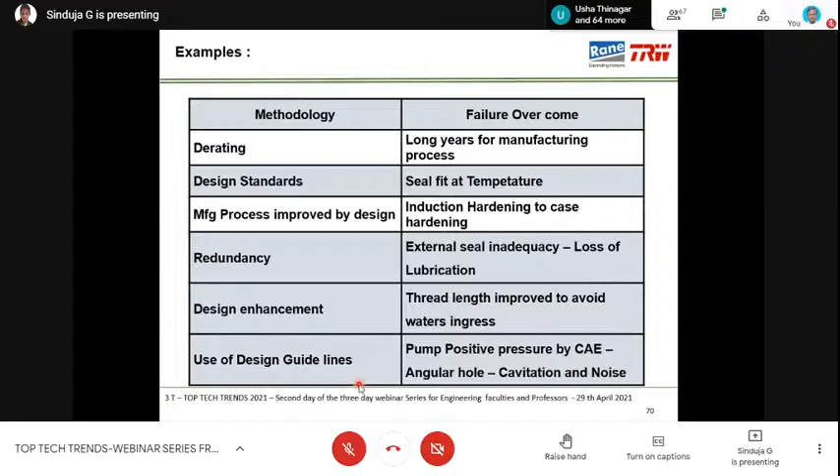So we provided an angular hole to increase the pressure from a negative pressure to a positive pressure, a non-classical way of thinking. So we were able to use the design guidelines to improve the cavitation and noise. Next slide, please.

Now, the assembly process itself was improved by the design. Manufacturing process improvement by design, as I told, in heat treatment from induction hardening to case hardening. Assembly process, we moved from a three-piece seal design to a single-piece design standard. And another example I wanted to tell here is bearing usage of the classical standard bought-out parts. So we had bearing movement.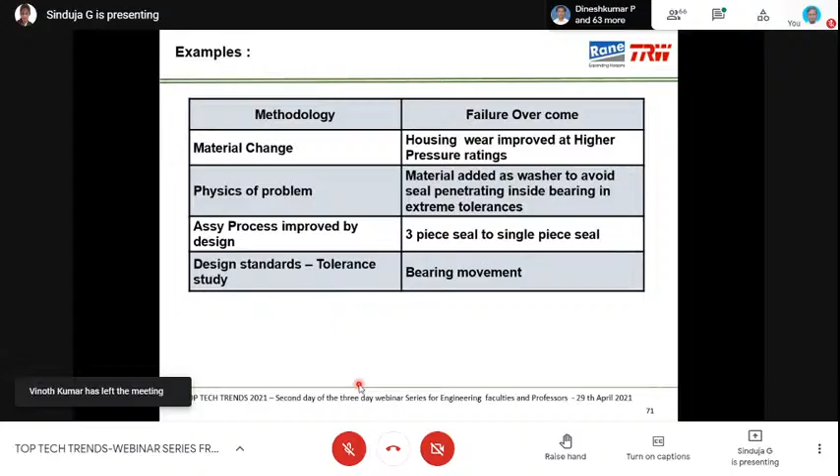I think we have come to the end of the session now. Thank you for your patience. I think we have spent almost 1.5 hours on this session. I hope it was interesting and useful for you to get some idea of what we do in the industry.

Question, doctor. At the beginning, I think you had a doubt if you would talk for 1.5 hours, but it exceeded the scheduled time. I have a couple of questions. One of the persons, Tenmuri Vendilaman, has asked, do you use X-rays for testing inspections? I'm not sure, it was posted quite early, around 4:17. Can you let me know if any X-ray is being used?

Madam is actually the principal of 2 government colleges, sir. Madam Tenmuri is here, her video is on. Madam, can you specifically state your question? I just want to know if X-rays are being used in Rane for inspection purpose.

I can tell you that it is not 100%, even during development. Only if we suspect there's a porosity in the casting, we go for testing by X-ray inspection. Otherwise, what we really do is take the cut section of the samples. We have a design standard telling where the porosity is, what type of porosity is allowed or not allowed. But if we're not able to get those porosities in those places and still have a problem of leakage, we go to the X-rays.